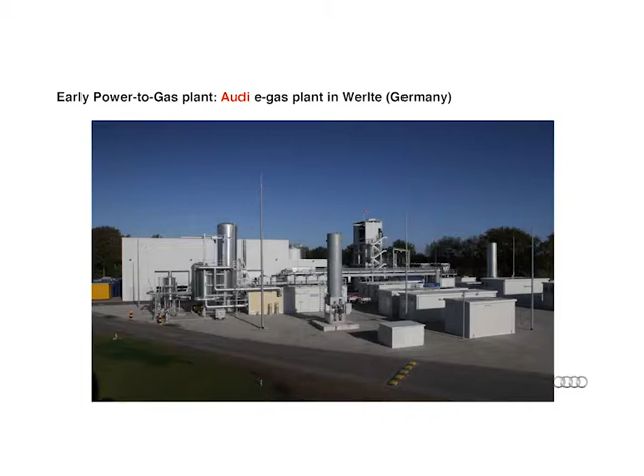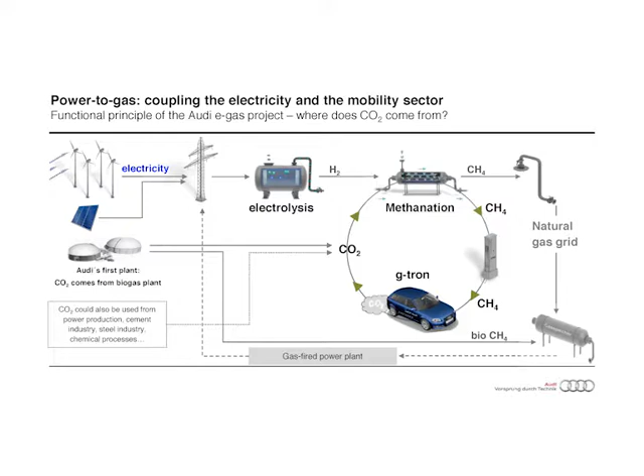Maybe you as Austrian students, and maybe students from a lot of parts of the world, have never seen the very big wind turbine parks in the northern part of Germany. When you are there, you will see sometimes that there's enough wind, a lot of wind turbines are running, but a third or even half doesn't work at all. And people say it's already broken, or there has to be maintenance done, or they are not yet in operation because they are very new. No, normally this is not the reason.

The reason is that, especially at the weekends, you have a lot of times where you cannot feed the electric energy into the power grid because there's too much wind.

And at first glance this is really surprising, because even in Germany, where we already have a lot of wind energy and also PV, photovoltaics, the overall mix of these fluctuating energies is at about 15% of the power of the electricity. And even so, this average 15% is sometimes 60%, when there's a lot of sun, when there's at the same time wind, and when the energy demand is low, for example during the weekends.

So already now, with a 15% mix of these energies, we already have problems integrating the energy into the grid. And when you imagine that we want to have 30, 40, 60, one day 80 or even 100% green energy in our electric grids, you can imagine that you sometimes will have double the energy you need.

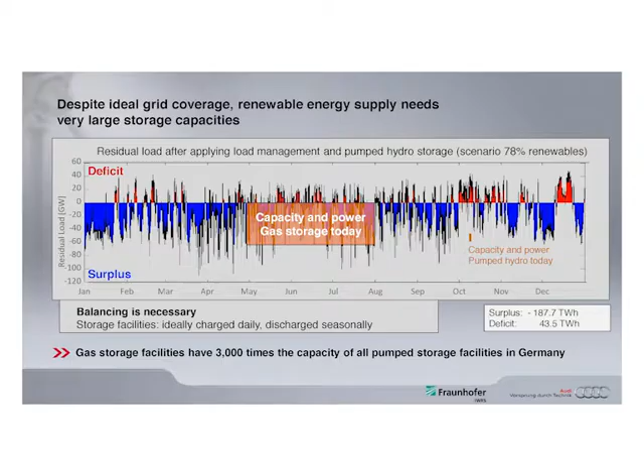This is a simulation from the Fraunhofer Institute in Germany. They imagined maybe the year 2040 or something like this, with 78% of the electricity production by means of green sources. Here, 78% in this simulation. And what happens to the grid if you let the wind turbines run all the time?

It wouldn't work. This is the nightmare for every grid manager in the electricity sector, because what you need here is a flat line at zero. The demand and the offer of electricity must be exactly the same. What you see here is the residual load. The question this graph answers is: how many conventional plants do you need, and what performance should they have, if you don't want to have blackouts?

So this is the red curve here. Sometimes you have peaks where you need more energy than wind and PV are offering. For these situations you still need other kinds of power generation, like gas power stations. But you also see that during a lot of times you have an excess of energy, and all this energy has to be cut off, because otherwise you destabilize the electric grid.

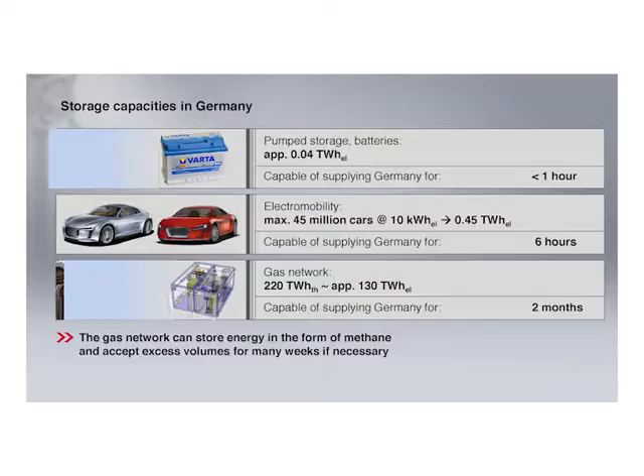There are other storage alternatives. I told you about these pump storage lakes, but if you want to give energy to the consumption in Germany, they last 1 hour, and then they are empty. The idea to make use of electric cars and their batteries is a very good idea, because these batteries give a very fast response and they have a big performance. So in order to control rapid peaks in the electric grid, this is an interesting solution, and we should follow this pathway.

You heard maybe the smart grid idea. Part of the smart grid is to make use of the batteries of electric cars. But even if all the passenger cars in Germany were electric cars, and the owners of these cars were ready to give half of their range to the public in order to make use of the battery as a buffer, the capacity to store and give back energy is about 6 hours. And the natural gas grid, compared to this, is in the region of months and not hours anymore. So completely different.

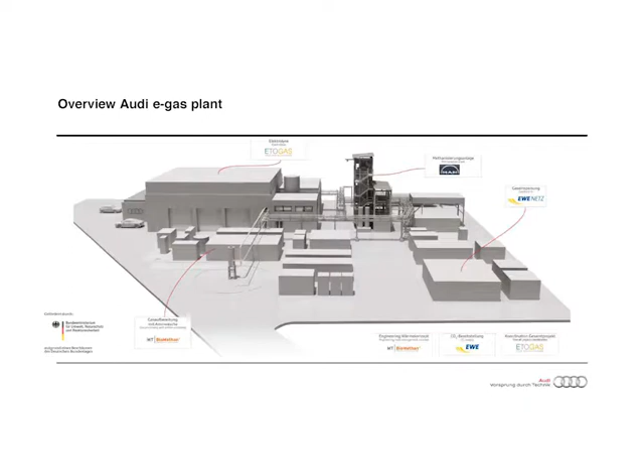Here you see the hall where we have the electrolyzers. This is the methanation unit. You all know the catalyst, maybe those who have their own car or know the car of the parents or friends — you have a catalytic converter in your car that converts hydrocarbons and carbon monoxide into CO2. You can imagine this similarly: it's a big tube where hydrogen and CO2 go in, and in the presence of a catalyst, they combine to synthetic methane, CH4.

In order to feed the synthetic methane into the natural gas grid, we need compressors. But a lot of the time we don't need them, because we feed this green gas into a local gas grid where you just need a pressure of 1 bar, and in the process we have more than 1 bar, so there's no additional energy needed. Just in summertime, when the local natural gas grid doesn't need so much energy, we have to push our stored energy into the transportation grid where we have about 40 bars, and then we need the compressors.

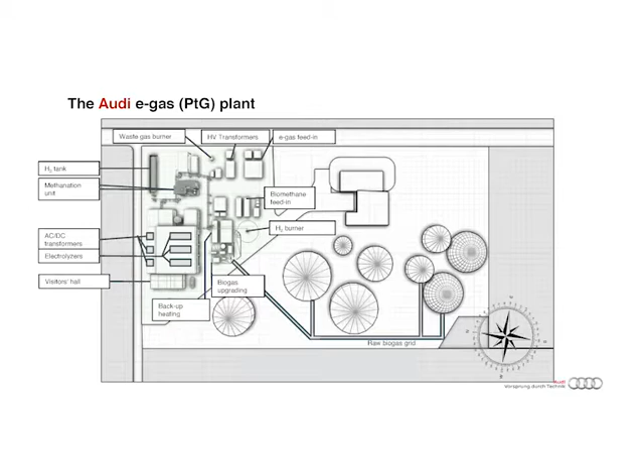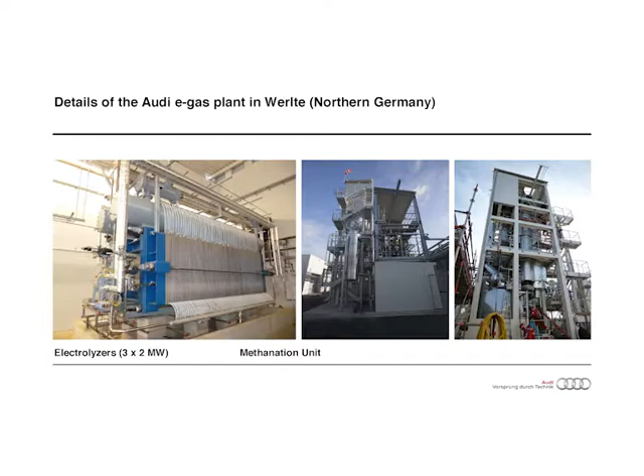I'll skip this bird's perspective view - more interesting are the photos. This is one of the 2 megawatt electrolyzers, more or less as big as a locomotive and also as heavy, about 70 or 80 tons. And this is the methanation unit - here you can maybe see a little bit the tubes where the methanation process runs.

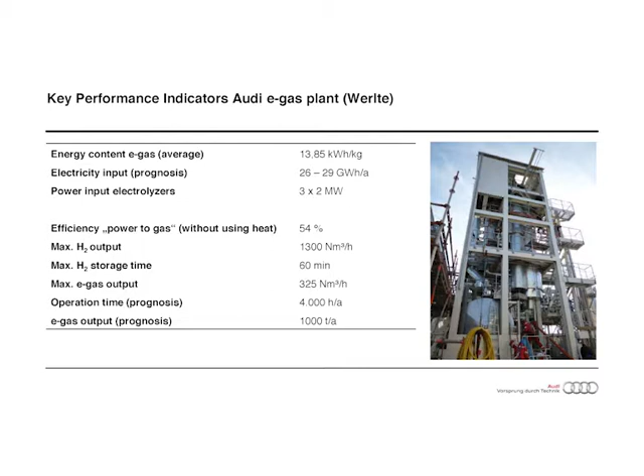So some data about it, maybe the most interesting data is this: the efficiency of the power-to-gas process from electricity to methane is at about 54% in this first plant. We'll be able to increase this in the future with better electrolyzers, but at the moment we're more or less at this size. So the other 46% go anywhere in the form of heat.

What's very interesting, we have put here an operation time of 4,000 hours a year. One year has 8,760 hours. So we've put 4,000 hours, which means almost 45% of the year this plant would run. And this is already a reality in Germany.

We have prices for electricity lower than 3 cents per kilowatt hour at the electricity bourse in Leipzig. That means there's very low demand for this energy. So by the integration of our green power, the result is that at many times of the year the energy is very cheap, because of course a wind turbine, when it runs, it runs - you don't have to put any carbon or gas into it, which makes you a cost.

So the differential cost - Grenzkosten - for a running carbon plant is always the price for the carbon itself, or in a gas plant for the gas itself. But if you use wind energy or sun energy, it's zero. So at many times of the year, the energy in the electric grid is already very low.

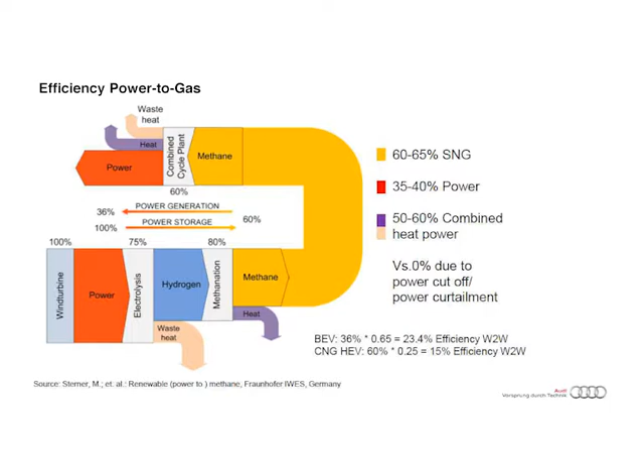So this is the efficiency pathway from the wind turbine - electric power, let's say 100%. A very good electrolyzer would be at 75% efficiency - this will happen in the near future. At the moment we're rather at 65, maximum 68% efficiency with the electrolyzers we have today.

So there you have waste heat put here. Interesting, because it's a low temperature loss, and normally in industry they say low temperature heat is difficult to make use of. The methanation process does have high temperature losses, and there you can use it for a lot of industrial purposes.

But let's put that aside for the moment - then you have here about 60 to 65% synthetic natural gas at that point. If you come to the idea of storing this energy and making electricity out of it later to cover the peaks you've seen in the beginning, then you have once again losses in the natural gas power plant. The best ones are at the moment 60% efficiency from gas to electricity, so in the end you'll have at a maximum 35 or 40% from electricity to electricity.

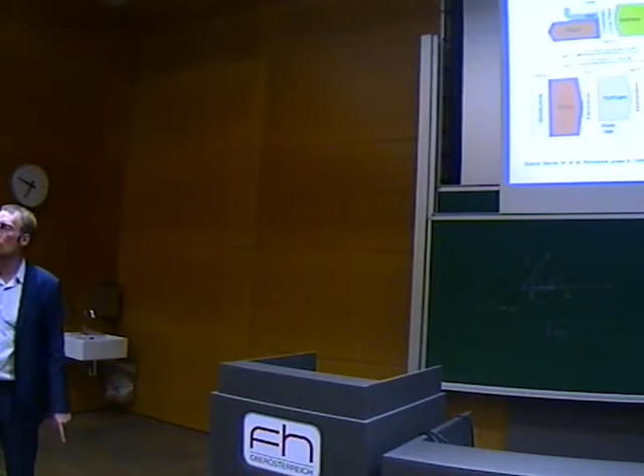But if you make use of the heat here - high temperature heat, and also here - then you can reach 50 to 60% combined power. And in reality, in our first-of-the-world power-to-gas plant in Werlte, we even make use of part of this low-temperature heat by means of some tricky ideas. Let me show it here.

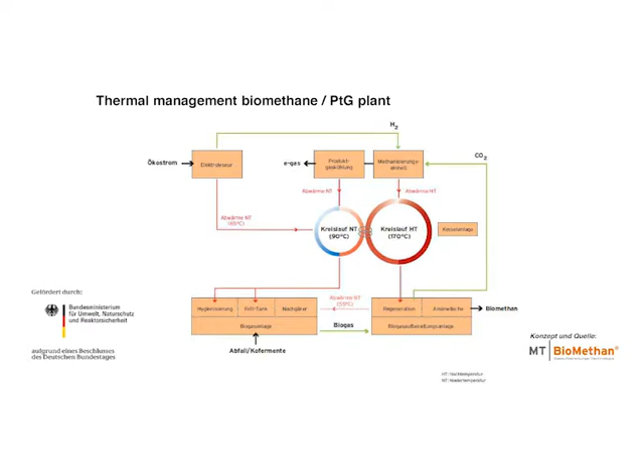Here you have the electrolyzers, and they have low temperature losses at 65 or 70 degrees. But we need 90 degrees here for the sterilization process in the biomethane plant. At an efficiency of 68%, this is a lot of heat, but at low temperature level. We combine here the high temperature circle coming from the methanation process, at 170 degrees, and make use of this high temperature heat in the separation process for the CO2 needed in the biomethane plant.

But at the same time, we give some of the heat to the low temperature circle, putting this excess energy to push it from 65 to 90 degrees Celsius. This way we can make use of the big losses that come from the electrolyzer. So if you think twice, sometimes in industrial processes you find very clever ideas that help you get rid of old thinking. A lot of people say low temperature heat is lost, but not necessarily.

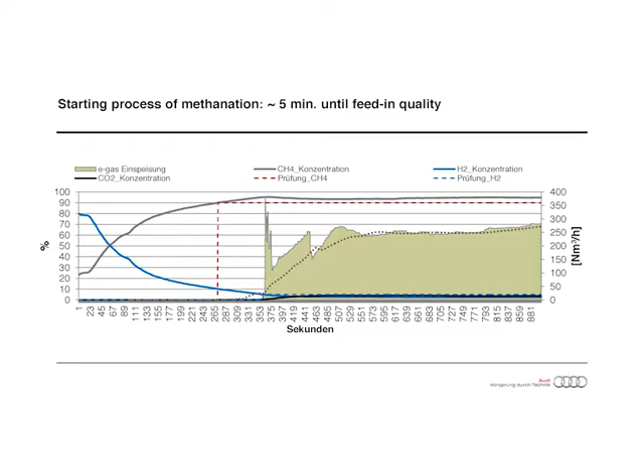This is a measurement graph of the running power-to-gas plant, showing how much time it needs to make the methanation process run. We are talking about some 5 or 6 minutes, and then we already have a concentration of methane at more than 90%.

So we have the quality we need to push it directly at any time into the natural gas grid. It does not need 1 or 2 hours, just some minutes. This is important in order to avoid losses.

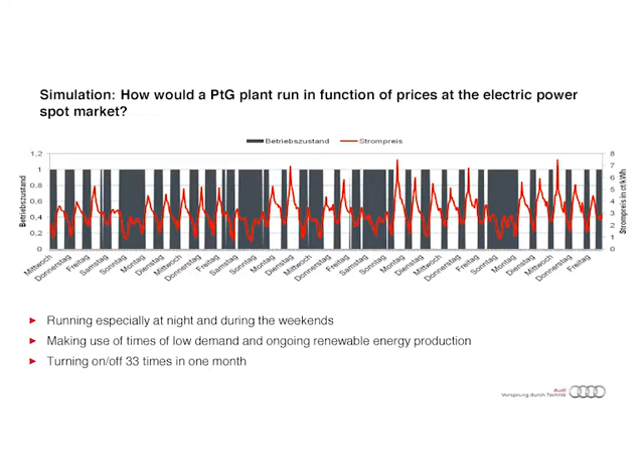And this is simulations we have made based on real data from the electricity bourse in Leipzig, according to the prices you have to pay for the electricity. Always when the prices are lower than 3 cents per kilowatt hour, we switch the power-to-gas plant on, because then electric energy is very cheap.

So we have a simulation of how this power-to-gas plant will run, and we see that normally we just have to switch it on or off 2 times a day. This is a very interesting result, because of course it's better for a big industrial plant to run steadily and not be switched off every 5 or 15 minutes.

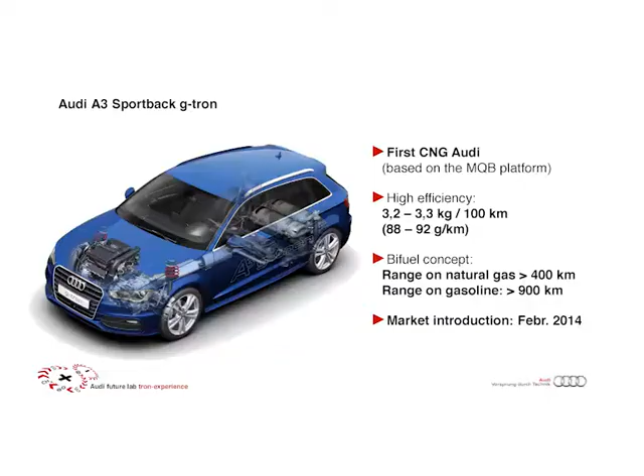Okay, coming back to the cars. All this is the energy sector. Now we are talking about the cars, but first we have a question here.

But this is a very low effect, because the maintenance cost of a wind park is very low, and it rather depends on time than on revolutions of the wind turbines. Normally, also with wind turbines, if you have to switch them off and even have a braking process to shut it down, then maybe you have more disturbances to the system than in a steadily running wind turbine that doesn't have to be decelerated. So this is not a big effect at all.

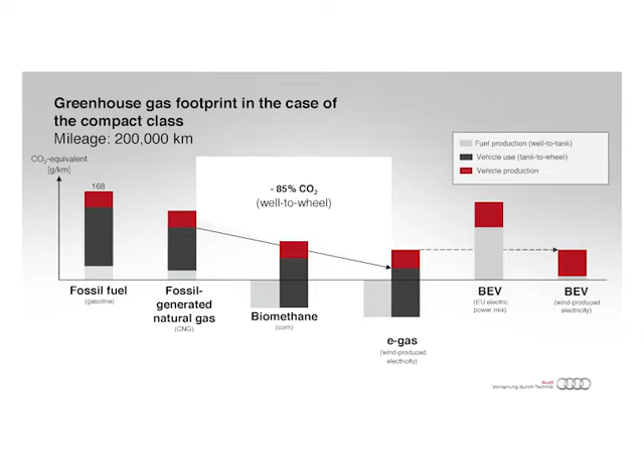But if you make use of the e-gas, then you have a better effect. We have made a complete life cycle assessment, taking into account also the production of the cars. Here you see a battery electric car has a higher burden in the production phase. You see also that a CNG car is better than a gasoline-fueled car. We also take into account the production of the fuel—for example, in a gasoline car you have the transportation of the crude oil, the refinery process, and so on. All this has to be taken into account in a life cycle analysis.

And you see here a normal CNG car is already better than a gasoline car.

And if you run it on this e-gas, it's much better, because in the production process of the fuel, you have a negative emission of CO2, because you avoid emission from another plant. And then the CO2, of course, the same amount is emitted by the car, but this is neutral. You just have the effects of the pressurizing of the natural gas for the 200 bar fuel tank and so on in this life cycle analysis.

But in the end, you are as good as a battery electric car running just on wind energy, because here you have better efficiency, but you also have the higher burden of the production of the battery and the complete car in case of a battery electric car. So very interesting in terms of greenhouse gas emissions and overall greenhouse gas emissions.

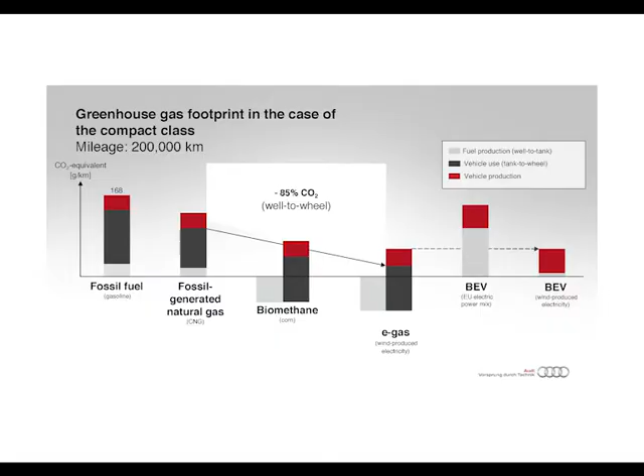Very good question. At the moment, we don't have the problem that there is not enough CO2. But of course, there sometimes is a misunderstanding. Some guys from the automotive industry say, 'Oh, that's perfect, we don't need any battery electric cars anymore.' But that's the reason why I said we don't have here the silver bullet to solve every problem.

Because of course, if you produced extra wind turbines to fuel these cars, you'd need 4 times more wind turbines or PV plants compared to a battery electric car. So this is a way to make use of excess energy, especially since the scarcity of excess energy is the bigger problem than the emissions of CO2 that you need to produce the fuel.

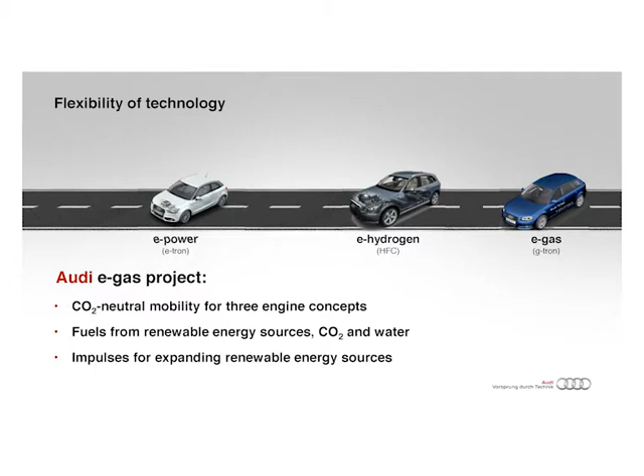And even in the future, if you have cut off all the fossil power stations, there would be enough biogenic CO2 coming from sewage stations, biomethane plants and so on. So this is not a big issue, and you even can get CO2 out of the air if you want—just more expensive.

So what's very interesting about this technology for the automotive industry is that you have a positive effect for more green power in the electric grid. This is good for electric cars because, as we have seen, electric cars are only green when they run on green power. You have a renewable solution for hydrogen cars, and you can already today, with existing infrastructure and with cars that are not more expensive than a diesel car, run climate neutral on the longer distance as an addition to the electric car.

So we have to see this solution as an addition, not as an alternative to electric driving. This is a very important message for us. And this is for reading afterwards—you will get the presentation.

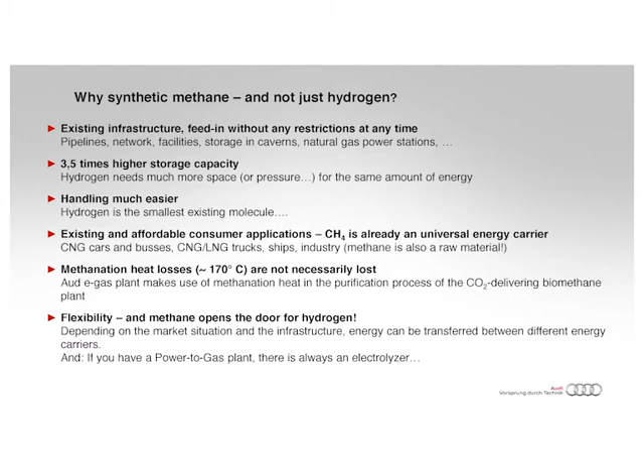Why don't they just produce hydrogen? That's a question they often ask us. Here are some reasons, and some reasons I told you already. And yes, this is the message.

We have a solution, not just for short distances with battery electric cars. We have a green solution also for about, in Germany, 8 million cars that could run with the energy we have there. So we cannot cover the complete car park with this solution, but we are talking about some million cars that could be fueled with this kind of fuel.

And yes, we have a very important technology to make the process of going to green energy in the electric grid faster. Last slide.

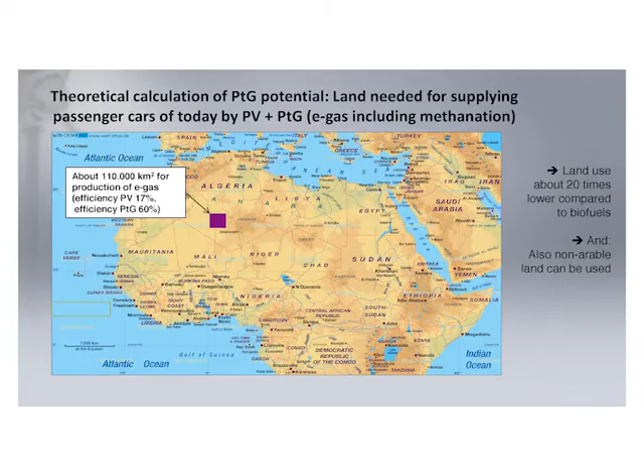I've just told you at the moment it does not make sense to produce additional green energy from wind turbines or PV to fuel these cars. But if you did, you would just need this surface of PV plants—and not in Europe, but in Africa, with the sun intensity of Africa—to fuel all the passenger cars in the world with the efficiency of these cars today. So, in theory, it is a solution, and this is the big point.

If you compare it to biofuels, you have a 20 times better use of area. At the moment, we are producing big amounts of bioethanol and so on, and you need a lot of space. And you already know about the competition between food and fuels—you are running into ethical problems. Here you need 20 times less space, so it's an interesting solution for the future, where we already have a lot of green energy coming from PV and so on.

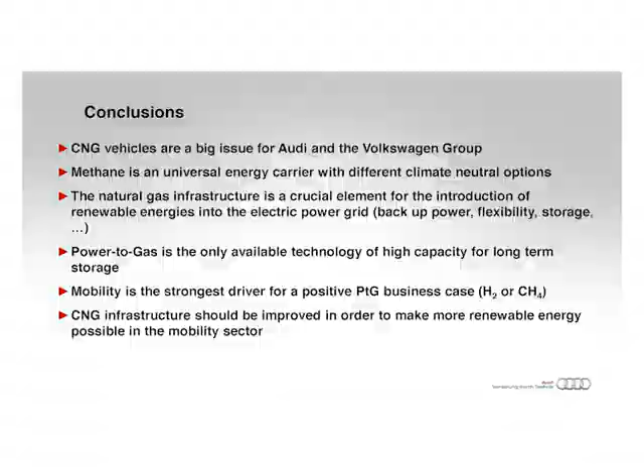Additional stuff to read. At the moment I will stop. Maybe you have some more questions, and I hope you will see this in the future and will maybe be part of this future where we put more brain and energy and skills into this kind of ideas.

This is just one idea. I think there are a lot of ideas that go into this direction to combine the energy sector, the mobility sector, and also the household sector, where maybe also heat is needed. Thank you very much.